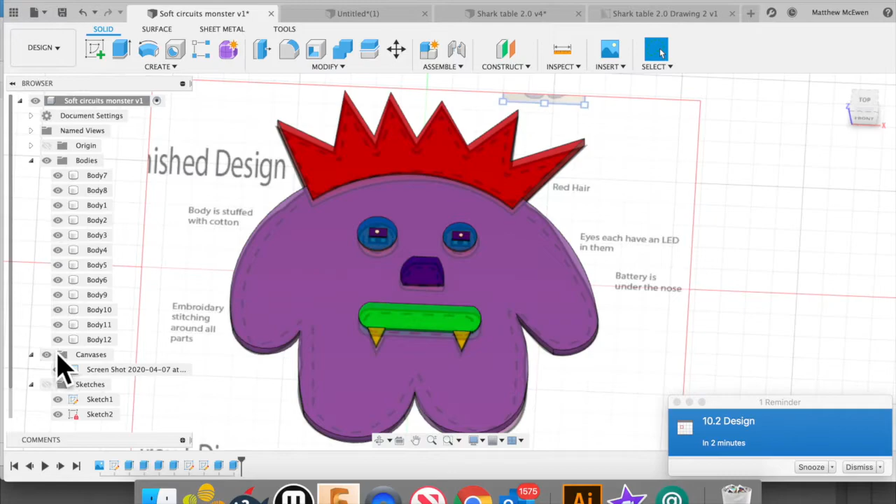Here's an example that I've done on my monster, and you can see I've used something called a canvas. I brought in a picture of my digital design and used it to create the sketches. Here's the sketches. I can turn off the canvas, and you can see that's just a sketch of my design. Then I extruded the bodies and colored them out.

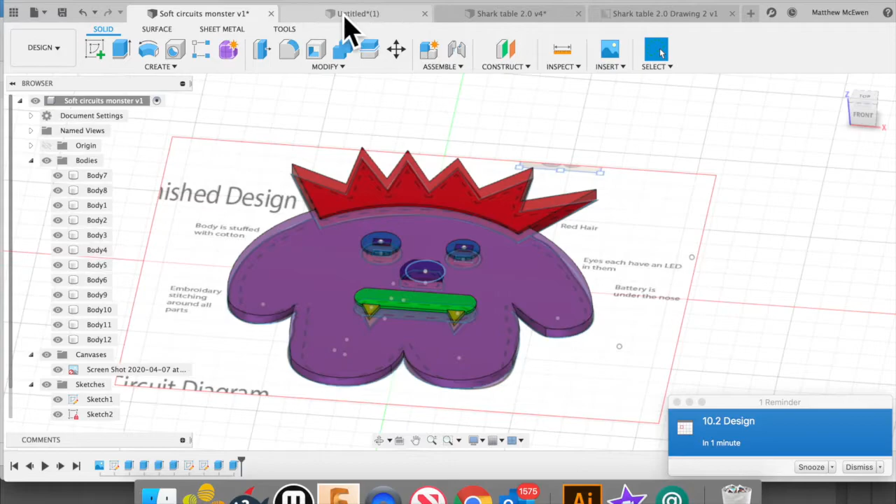So let's get started.

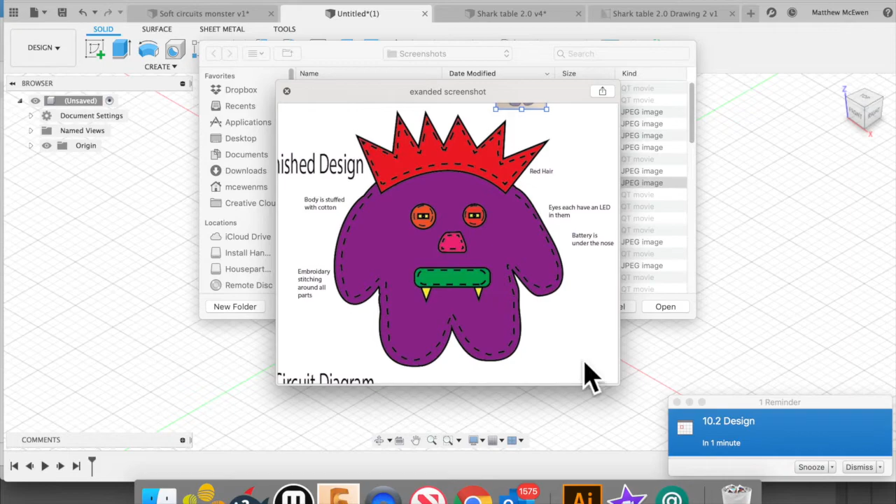First you're going to click Insert and Canvas, and go to your computer. You should have gotten a screenshot of your design. Here's one of mine, but I didn't want all this other stuff, so I did a closer up one of just the digital design. I'm going to ignore everything else. Go ahead and open that, and then click on the workspace on the bottom.

You'll notice click the top, and I'm going to grab the scale tool, which is the quarter circle that I'm grabbing there. I'm just going to make it this size. Click. You can obviously rotate it and change the positioning, but go ahead and click OK.

Then you're going to click on the sketch button. We're going to click on the work plane where you put the canvas on, and all our sketch tools come up. You can see there's lines and circles, and I really only use the line tool and the arc tool to kind of make curves. I did use the circle tool a little bit and the rectangle tool. You can play around with all the other tools, but it really was just lines and arcs, and I used the trim tool a few times to trim parts off.

So I'm just going to start real quick, create some lines for this part right here. Then I use the trim tool to trim off this little bit. If you don't need to use the line tool anymore, just push the escape button or click a new tool.

There's the arc tool. Click 2 points and then you create the curvature. I found that a really good tool to use here on all these curves. Making sure that you're creating closed shapes, because you definitely want to make sure you're creating shapes that are closed so that the lines are actually creating individual shapes.

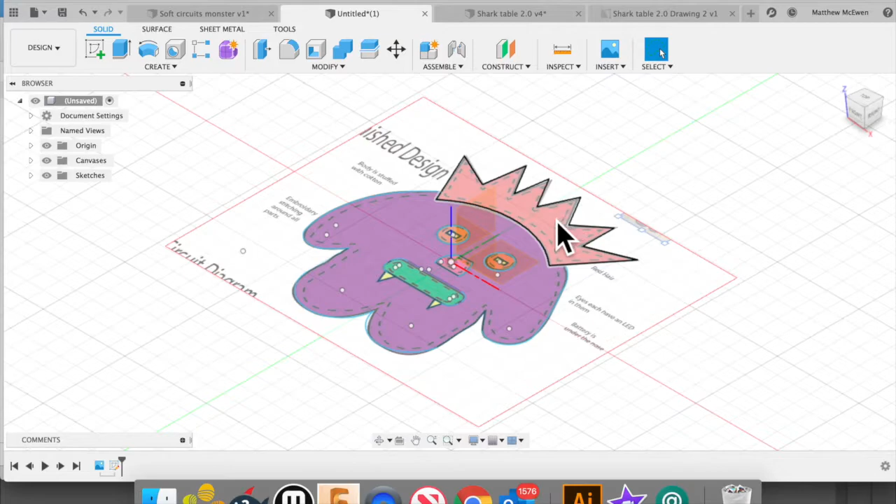I'm using the circle tool, the rectangle tool. I use the rectangle tool and the fillet tool to create that. And now if you look, finish the sketch, kind of look back at it, you can see I can highlight all the different parts and get in a little closer. My mouth, my teeth, all the parts are closed, and that means we can extrude them.

Alright, so at this point you can turn off your canvas and see your sketch, and the individual shapes are highlighted, and I can click on them and use the extrusion tool on them.

So the first thing I'm going to do is them separately. I'm going to click these 4 parts and click the extrude button. If you hold shift, you can select multiple bodies. I'm going to make them come up 5 millimeters, and make sure it's on new body. I want all the parts to be their own bodies. You can see here I've got 4 bodies. Go ahead and rename them to keep it organized.

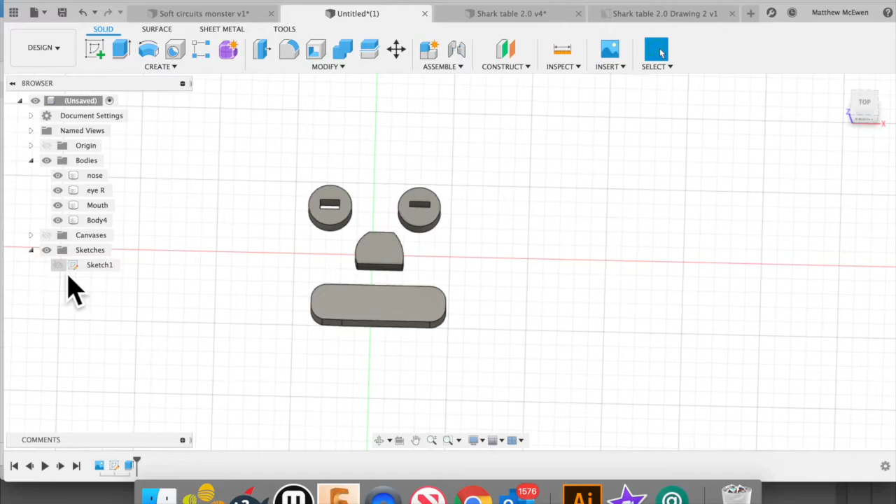One thing is it automatically turns off your sketch when you extrude, so you'll have to turn your sketch back on. Start extruding the rest of the sketches into bodies.

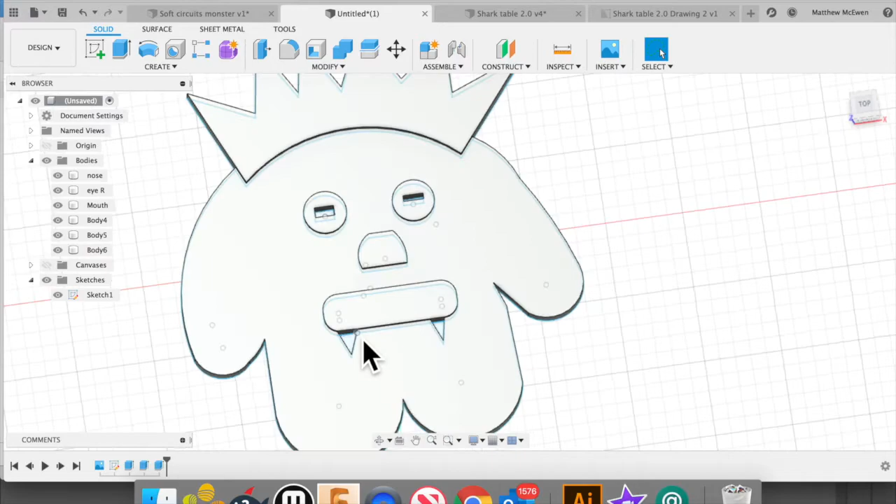I made the main body 4 millimeters, and then things I wanted to look like felt pieces on top, I made 5 or 5.5 or even 6. Getting close. Hold shift to select more than one body, and make sure you're creating new bodies with every single extrude so that each shape is its own body.

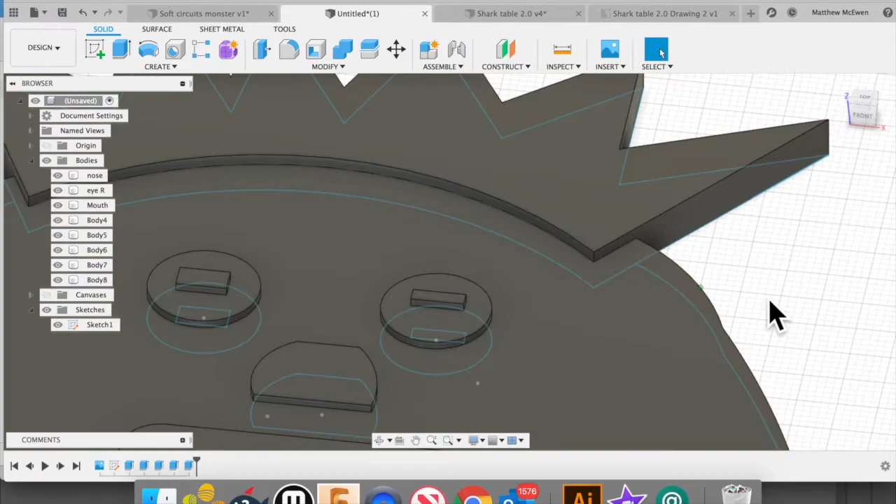Do the eyes, scroll in, hold shift, click extrude, and I'm going to have them even a little higher, so I put them at 6. Okay, one of the things I just noticed is that my 2 LEDs are different sizes, and that really bugs me.

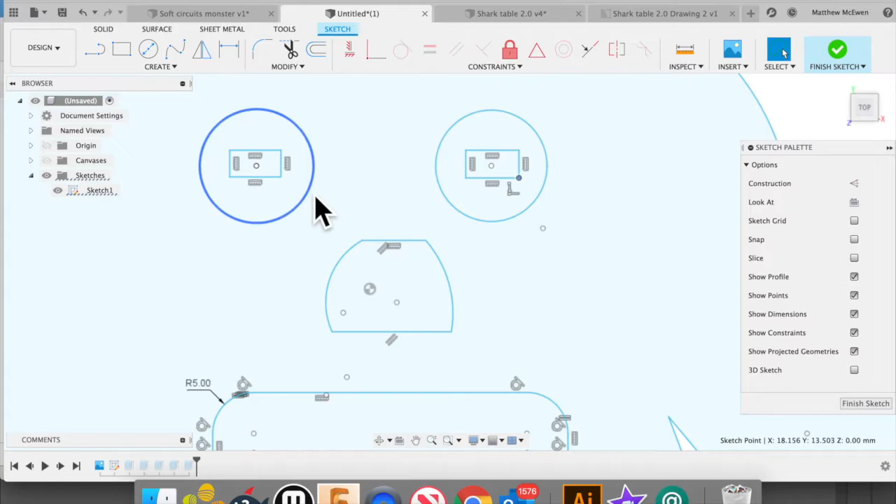So one thing you can do to fix things: if you double click on your sketch down here, it takes you back into the sketch. You can adjust or change the sketches in many different ways, just using the handles here. And then when I click Finish Sketch, it corrects all the problems and re-extrudes, and there it is.

Okay, now we can go to Modify Appearance, and this is how we're going to change the color of the different parts. So there's the Appearance dialog box, and you can see there's only one material. So we're going to type in Fabric here and search. We're going to look for Downloadable, and this little download button needs to be clicked for all these color fabrics. You won't have them, so click.

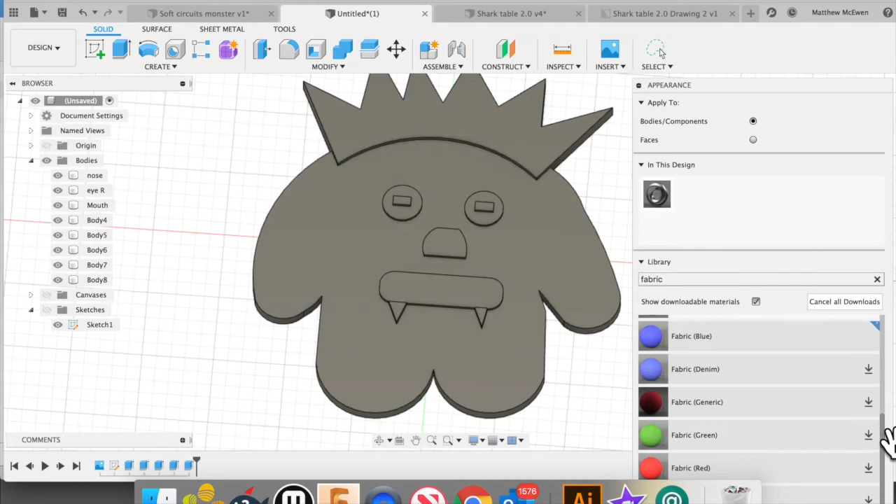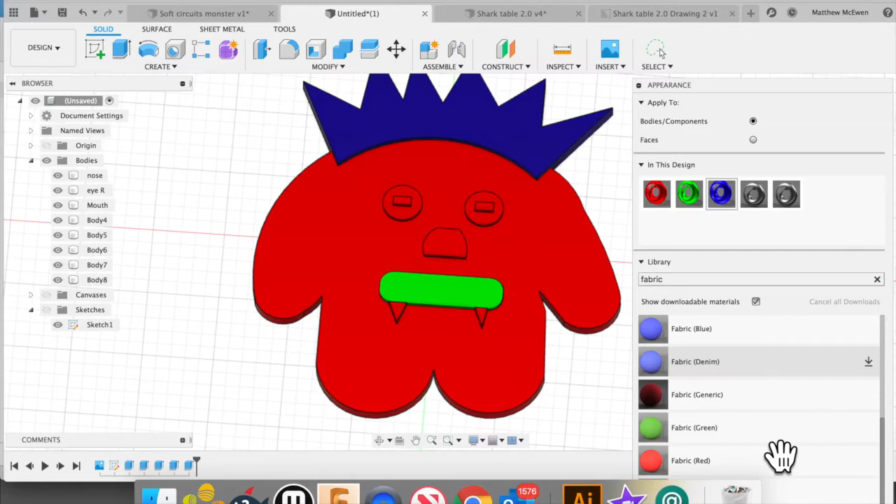Now the only color we have is this gray color, so we're going to control click and click duplicate. Then each of these can be double clicked on, and you can change the color. That way you can drag the colors you want to the bodies and color them. You can also use the fabrics that are down here as well. I believe they're pre-colored, so there are some colors in there.

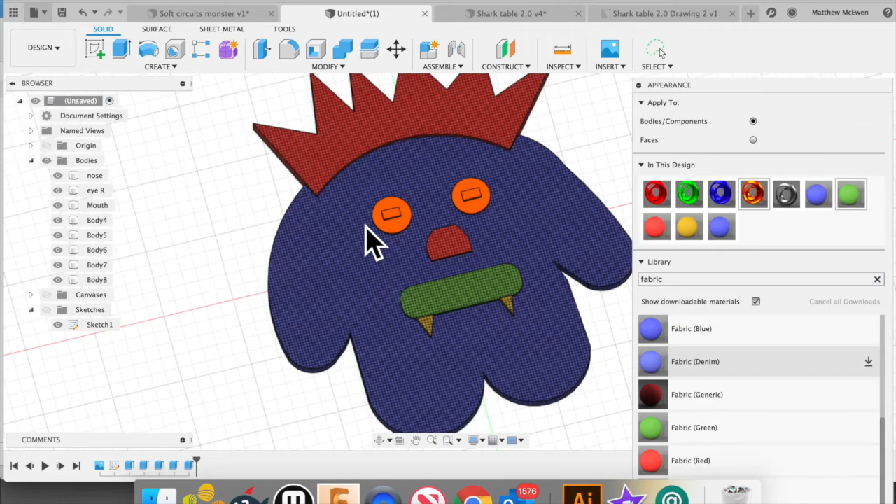And once those are done, you can go to Design and go to the render function. That'll open it up here with some better lighting. Turn off your origins, turn off your sketches, your canvas, and then you can just kind of screenshot this as part of your final display of your final product. There you go.